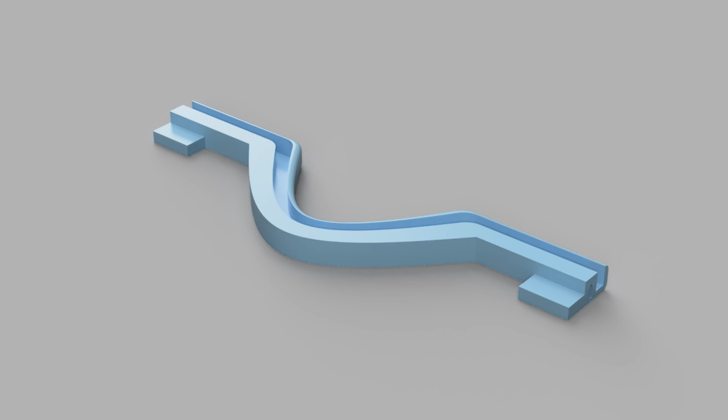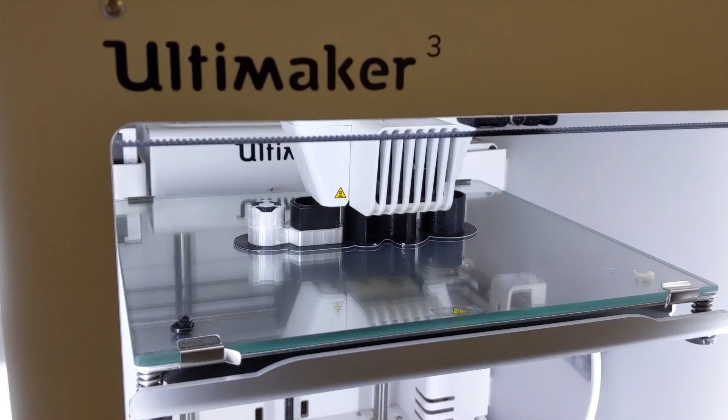Prototyping flexible parts can be really tricky. Most 3D printers, just by the nature of fused deposition modeling and stereolithography printing, favor rigid parts. A printer lays down a bead of molten plastic, which then cools and solidifies, or resin is cured solid by a laser. There are a few 3D printers that can produce flexible parts though. In our advanced prototyping lab, our Objet 3D printers can produce very high fidelity soft parts, but they're less elastic than some parts demand and tend to tear under stress.

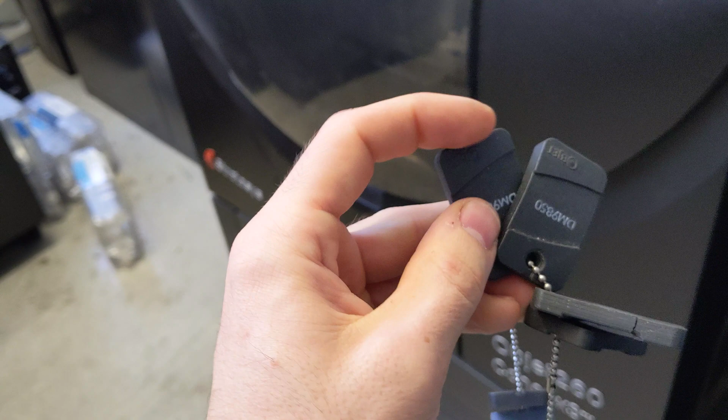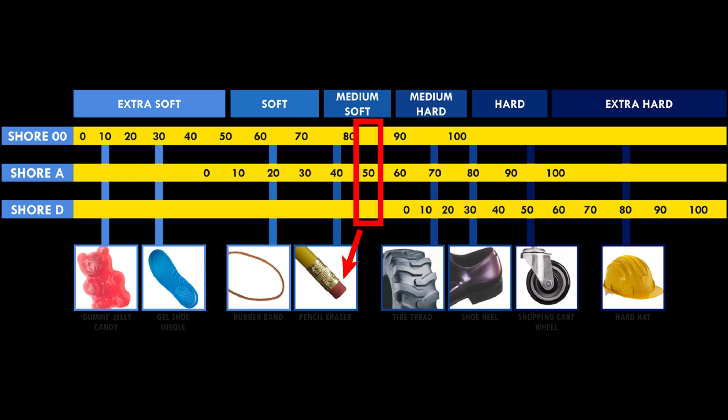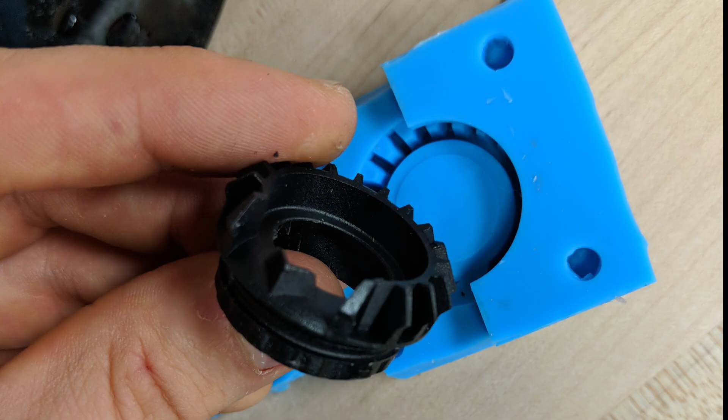The Form 3 3D printer can also make use of an elastic resin, but at a durometer shore hardness of 50A, roughly equivalent to a pencil eraser in flexibility, this material may still lack the properties you seek in a truly elastic part. At this point in the prototyping process, we begin to explore casting. Casting can have a little more overhead in terms of labor than 3D printing, but the range of material properties you can achieve is much greater.

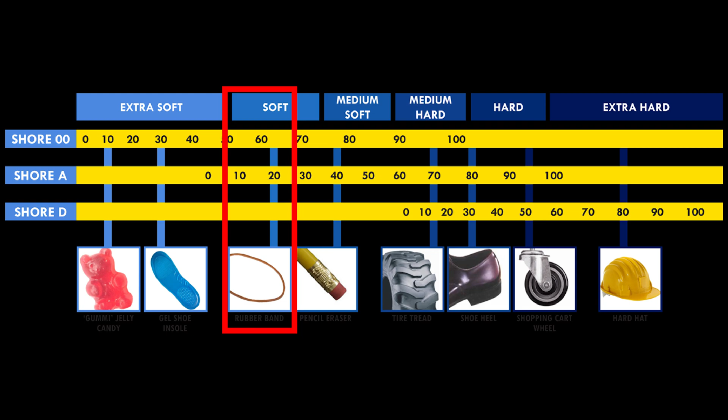In this particular case, we're looking for a silicone part with a rough shore hardness of between 10 and 25A, closer to the consistency of a rubber band. Silicone also has the advantage of not sticking to anything except silicone while curing, meaning we can actually 3D print our mold in PLA.

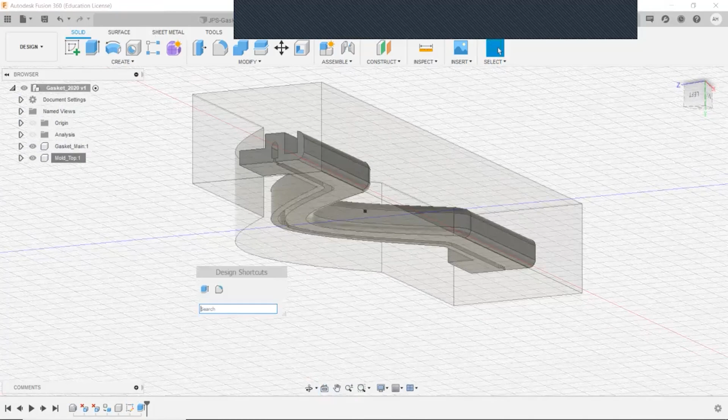Here you see me bringing the part into Fusion as a step file, and then designing a mold around it. I'm going to speed through this process, saving the details for another video, but some broad considerations here are draft angles, or preventing too many undercuts, although it bears mentioning that silicone is capable of peeling out of molds that rigid parts would be fully stuck into.

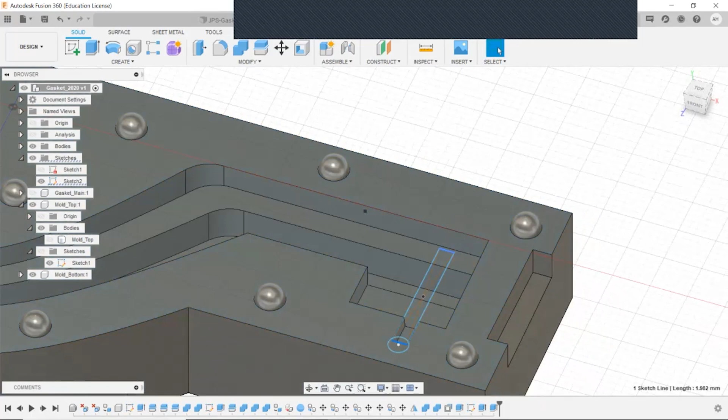Alignment features, these spheres you see me placing help align the two mold halves, so you get a perfect part through alignment every time, and some cavities in the sides for prying apart the mold halves later. And of course, a gate and sprue where I'll either pour or inject the two-part silicone material, and then another hole through which air will escape.

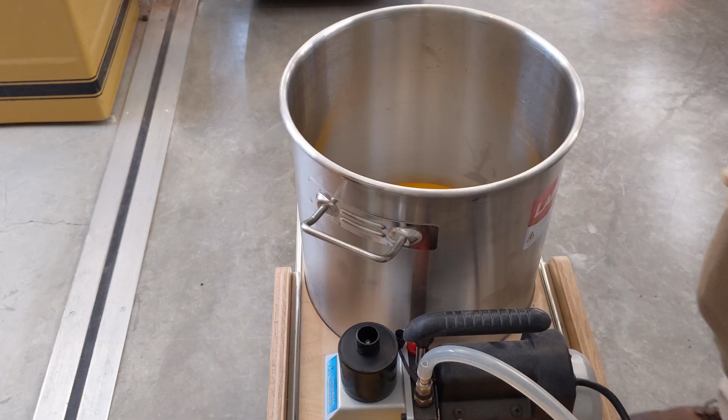Once the PLA mold has been printed, it can be clamped or rubber banded together. The silicone I'm using is a Smooth-On product that cures to a roughly 15A shore hardness in about 4 hours. Best practice is to mix your two parts together thoroughly, stirring and scraping the sides for between 30 seconds and a minute, depending on the pot life of the material, before pouring into a new cup for final mixing. The new cup makes sure that no unmixed materials from the sides contaminate the final pour.

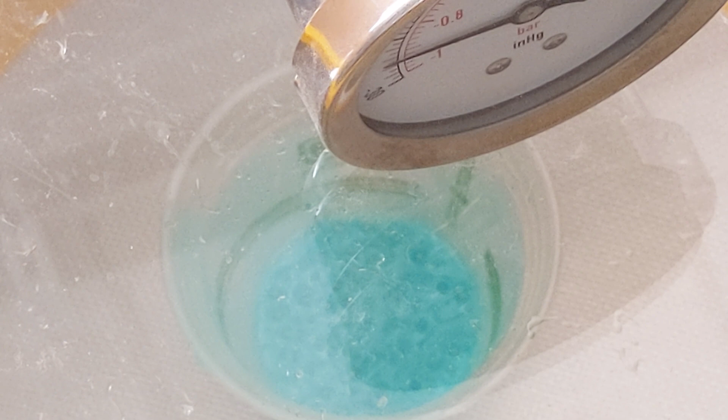Once everything is mixed, we use a vacuum chamber to degas the silicone. A vacuum chamber removes most of the air that is mixed into the silicone as bubbles, and this is especially important when casting clear materials or when you have thin walls or small features. If your part is lower fidelity, or if you're making a mold for a part with larger features, you could sometimes get away without degassing your silicone, or with other DIY strategies for reducing the amount of bubbles introduced through stirring.

At this point, the silicone can be drawn into our syringe and injected into the mold. If you don't have a large syringe, this particular one is from Tap Plastics, or you can get them online. You can use a funnel or build a larger well directly into your PLA mold. Material is injected at an angle so air escapes upward as the material fills the mold, and the part is left to sit for the 4 required hours.

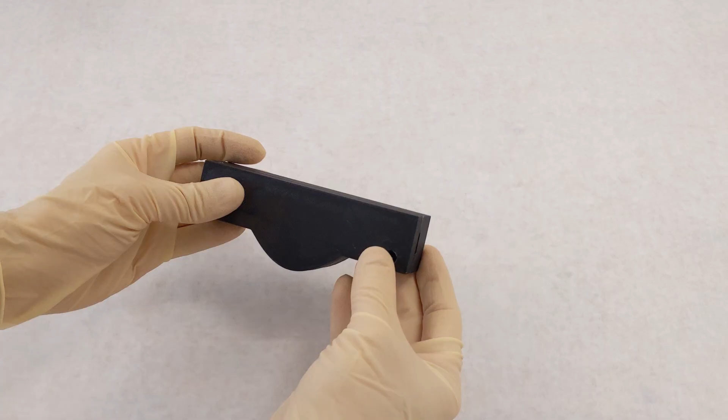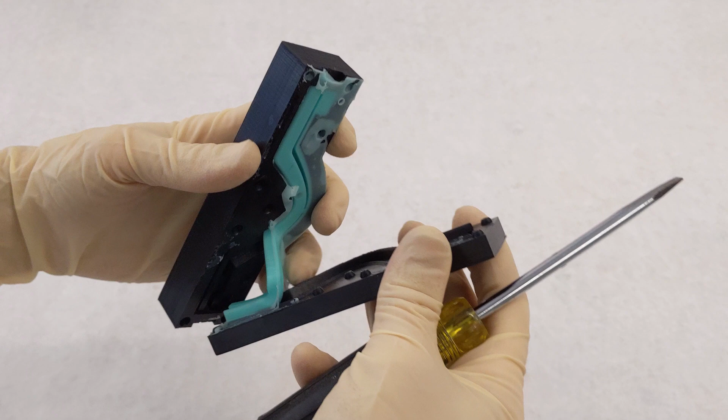With thoughtful mold construction, demolding can be fast and easy. Silicone is forgiving during the demolding process since it doesn't chemically bond to PLA, and a 15 shore A part can be stretched and pulled out of any undercuts or steep draft angles left in the mold. After the part is demolded, the mold can be used again right away to cast more parts.

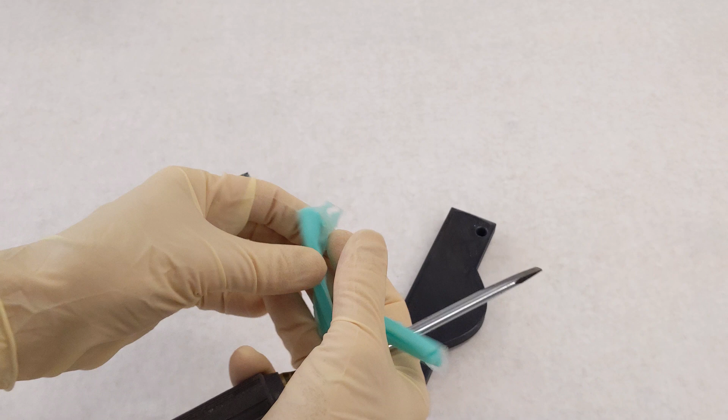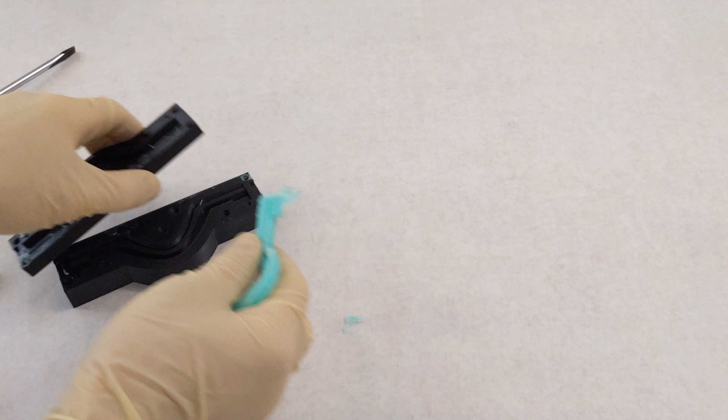Casting can feel intimidating because it can seem messy, sometimes requires a scale for precise measurements, and cure inhibition when using platinum silicone can risk ruining both a part and its mold. But most room temperature casting is as easy as mixing and stirring a few compounds, pouring the results into your mold, and waiting patiently for your part to be done.

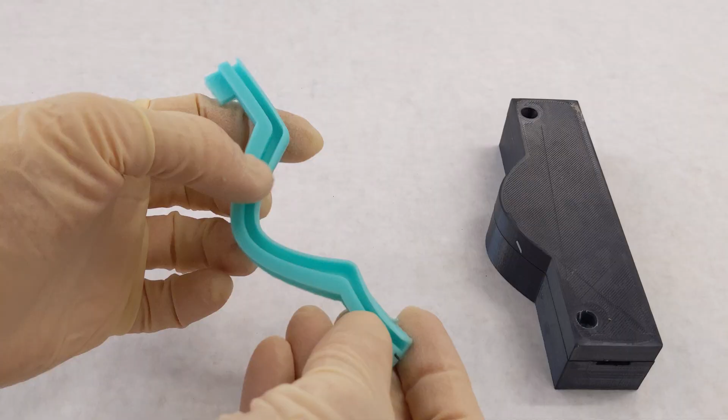The final step here is to cut away the sprues and to trim off any flashing that occurred around the parting line between your mold halves. Flashing is common in casting and is one of the main considerations when developing the initial mold. Taking time when developing your mold to make sure you have good alignment can make this final post-processing step incredibly fast and ensure you're producing high-quality parts every time you cast.